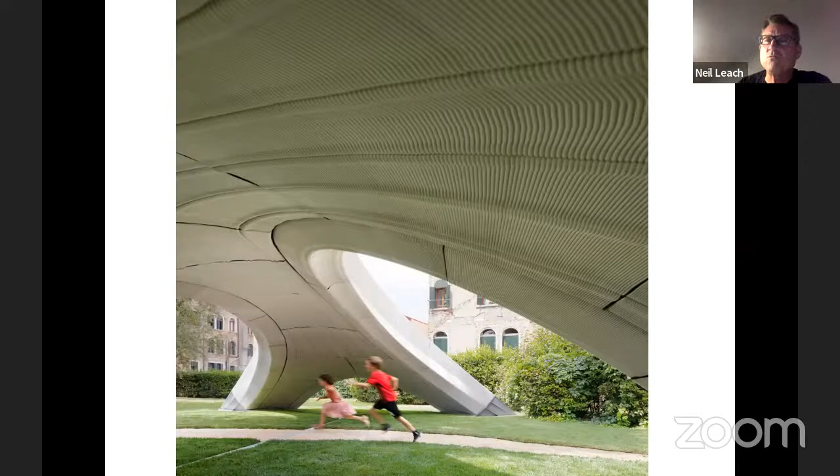Items in the house itself, tables, chairs, and so on. Clearly, something new had arrived on the scene, and very significantly too. And it wasn't just these furnitures; it was also these outfits. This kind of chainmail logic had been used to explore how you could produce clothing.

And of course, a few years after that, Behnaz Farahi and I edited an issue of Architectural Design on 3D printed body architecture, looking at this. A number of architects who were involved in this kind of world. There were shoes and even prostheses.

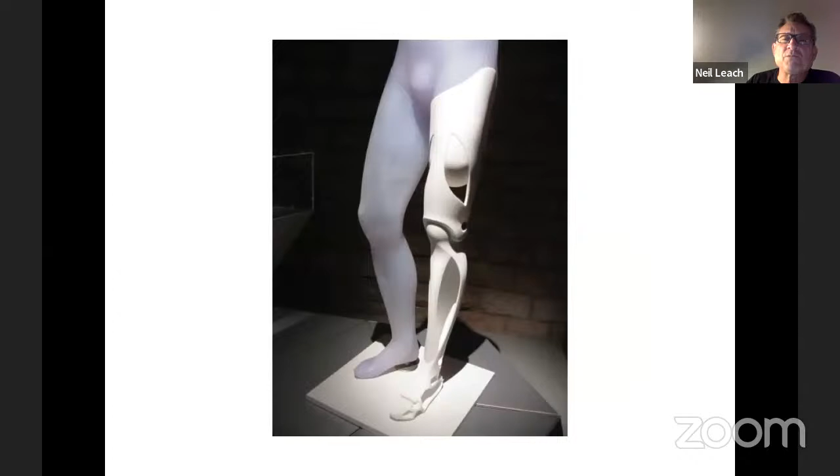It was a very interesting exhibition, but the architectural side of things was actually relatively behind. While all the items in the house had been 3D printed, the house itself was very far from being 3D printed. So these were the three exhibits that Marta put together for this exhibition.

In the background, a chaise longue that was designed by Kol/Mac and fabricated by Enrico Dini, really a pioneering effort. In the foreground, some small samples from Behrokh Khoshnevis, who was probably alongside Enrico, the leading pioneer at the time. And in the middle, there's a piece that was done by a group at Loughborough University in England that was initiated by Rupert Soar.

But this was it. This was it. Compared to the rest of the exhibition, which was very, very advanced, architecture and the world of 3D printing buildings was relatively far behind. I'm delighted that you have Enrico here today. He was absolutely a pioneer in this. He established D-Shape many years ago and was really very significant. So I'm not going to say much about it.

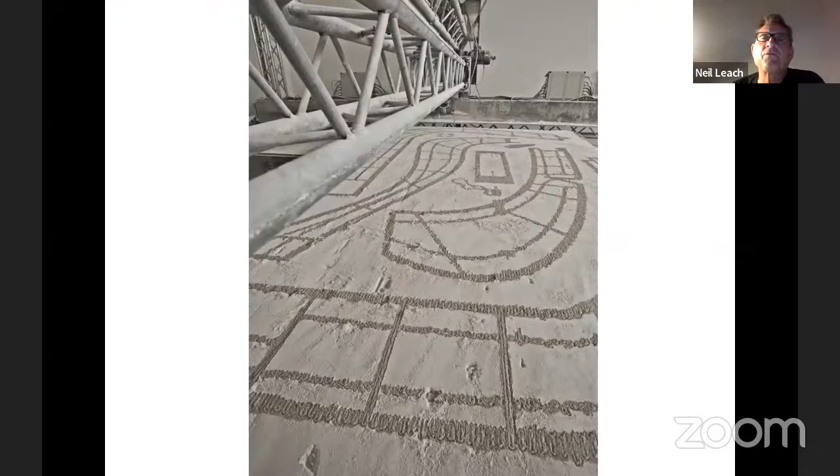It's simply to point out that his early pioneering work with D-Shape, where he was effectively 3D printing using a giant Z Corp printer with his own proprietary method, was really a great breakthrough for the world of 3D printing. And these were the components that he assembled into arguably probably the first ever building as such. I mean, how do you define a building? But this was an enclosure, and Enrico was responsible for this, alongside the chaise longue that Sulan Kolatan and MacDonald designed in New York, and it was fabricated in Italy.

The other great significant figure at the time was Behrokh Khoshnevis, who was an Iranian-American engineer based at the University of Southern California, with whom I collaborated when I was at the University of Southern California. And let's not forget that Digital Futures itself was a collaboration initially between USC and Tongji in Shanghai. And Behrokh himself came to one of our events to talk about his work.

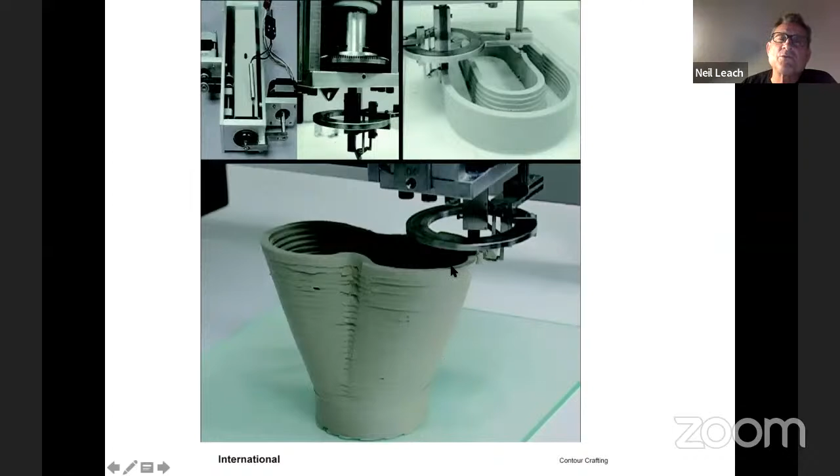And this is contour crafting. This is the technique that Behrokh established, a very different technique of layered concrete construction, where the concrete was extruded like toothpaste, and there's a spatula that was smoothing out the edge, so we get a much smoother finish to that. And this was very, very carefully controlled by Behrokh. He built a few example walls, but didn't necessarily go so far as to build a building as such.

When Behrokh came to Shanghai for the Digital Futures event, we introduced him to one of the local fabricators with the idea of some kind of collaboration. In fact, there wasn't much collaboration, but WinSun of Shanghai did build what they claimed to be a series of the first 3D printed buildings. I would claim that Enrico's was already there, but there we go.

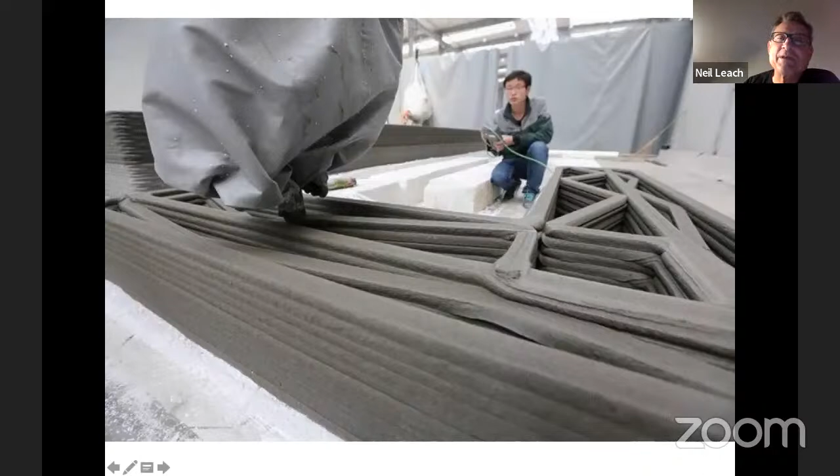And what was interesting is they effectively borrowed the technique from Behrokh. Behrokh was actually quite flattered by this, and he was interested to find out that, in fact, the technique of internal reinforcement that he'd imagined would work actually did work. Anyway, these buildings were built; they claim to have been built in 24 hours. Behrokh is somewhat suspicious of that. He thinks that it would have taken much longer for the concrete to cure in the factory before putting them on site. But it was done in the factory and then assembled on site.

Since then, they've gone on to produce things like this, and one could say that the whole field of 3D printing has really evolved. These are early examples of buildings in UAE, United Arab Emirates, where you can see that 3D printing has come of age, and it would be impossible to do a survey of what's been happening recently because the whole field has exploded.

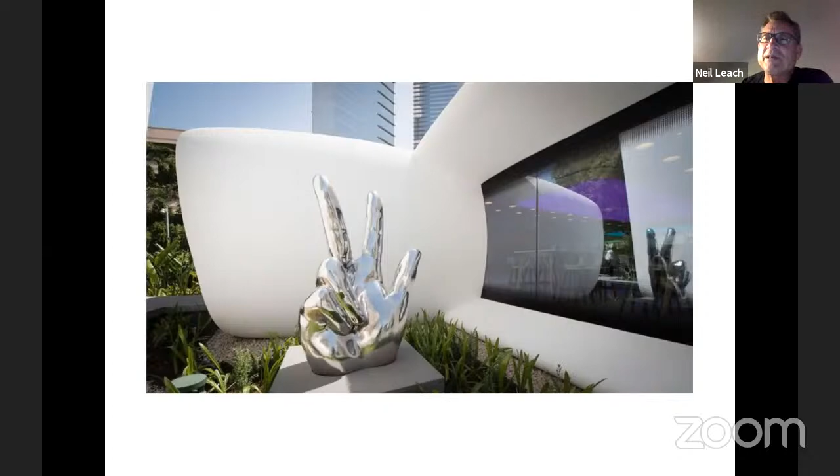And with the use of robotic arms and different materials for printing, the possibilities have really enlarged. We've moved beyond the bed of the 3D printer to something which is so much different. But I want to briefly also mention another aspect of this rivalry. I say a friendly rivalry because I actually introduced Enrico and Behrokh at the Bauhaus, I think in 2013 or something like that, 2010 or 11. And they got on very well.

We had a conference there about extraterrestrial architecture. There were two different ventures going on at exactly the same time, intriguing in many ways. One was a venture that was sponsored by NASA. This was the one in which I was involved with Behrokh Khoshnevis, with Anders Carlson and Madhu Thangavelu. This is our contour crafting machine on an ATHLETE hopper, printing material on the moon out of regolith.

So to house landers, it wasn't to make habitable dwellings, unlike the European Space Agency, who would fabricate complete buildings. NASA's project was to send the building already assembled to the moon. And then alongside this was a consortium in which Enrico Dini was involved, that involved Norman Foster Associates and several other organizations, which was looking at how you might actually fabricate a complete building on the moon. This was sponsored by the European Space Agency, and we were unaware of each other.

These two competing consortia were developing this, but this was a very different sort of way, where these mini little robots were printing onto a kind of inflated formwork and producing something remarkable. So that was back 2012, 2013 when these things were happening. And since then, of course, 3D printing has exploded. It's become a major event.

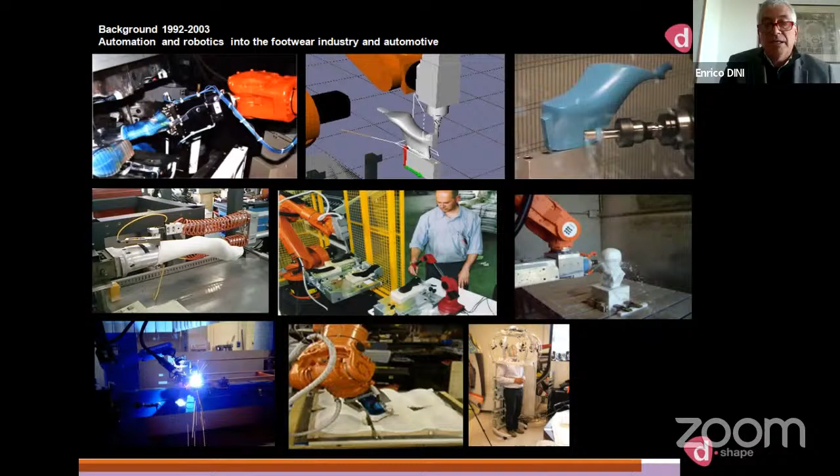Maybe nobody knows, but 3D printing in architecture started from the footwear industry, where I used to be involved until the invention of the 3D printing. And why I invented this? Because in the footwear industry was a quite new and fascinating device, a 3D printer developed by Z Corp.

This method, invented by Emanuel Sachs and other people at the Massachusetts Institute of Technology, was the most intriguing device I ever met in life, and willing to become a reseller, a dealer in Italy of this machine, I gave a presentation exactly to Piaggio, the factory where my father used to work.

And that morning, I had the idea that scaling up this process, that is a powder deposition process, this process properly scaled up might be used to print buildings. This is the idea to which I later devoted all my life to make it happen.

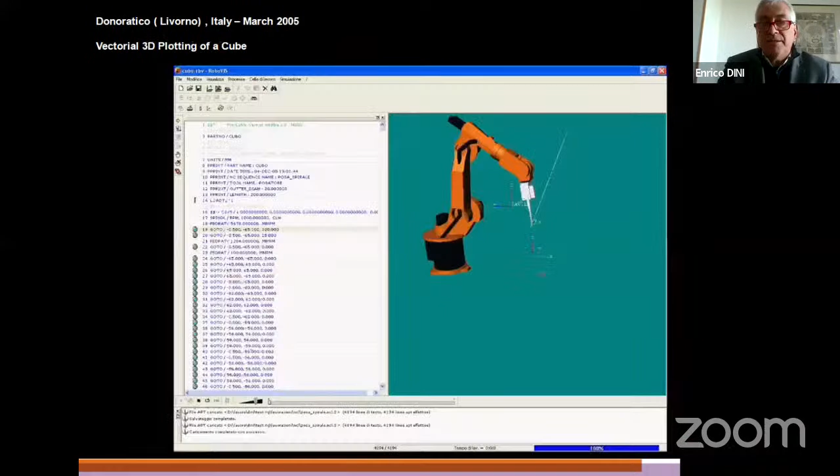And as an engineer, when you want to make something related to building construction, as a starter, you print a cube. So to do so, because I was a KUKA integrator and I developed what I used to call a post-processor, an offline simulation system that was later used as a standard by KUKA, we printed a very first cube.

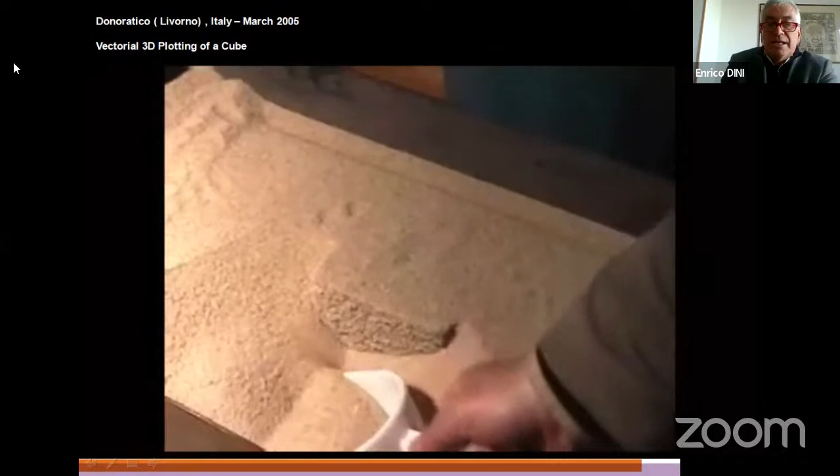I want to share with you this video that is related to probably the very first 3D printed item for architecture or building construction, merely, banally, a cube that we printed in Tuscany in 2005. And then because I was completely ignorant about parametric architecture, having made the classic studies, I decided to print a very classic Greek column.

And then when I realized that this process was too slow, in my opinion, for printing buildings fast and cheaply, I wanted to have not only one nozzle, but a multi-nozzle machine. So I abandoned the vectorial printing strategy, the one commonly applied today, and I moved toward a raster printing method called today particle bed 3D printing. So I wanted to develop the analog of an inkjet printer at a higher scale.

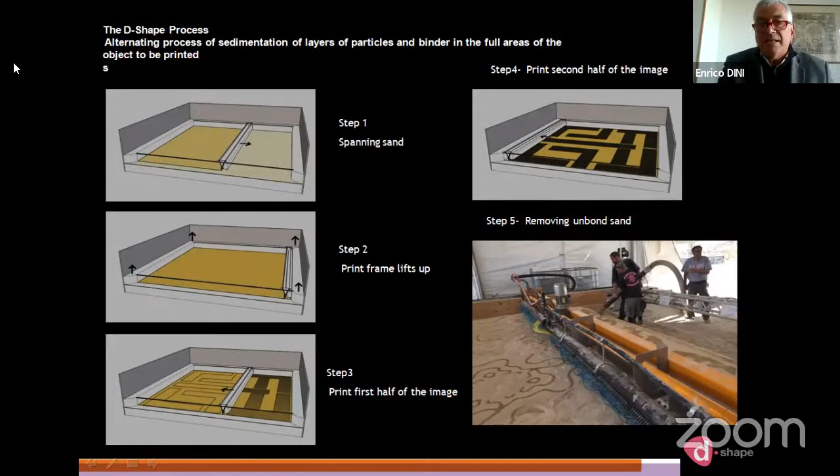Some of you maybe have seen my process several times, but in principle, the building process that I invented, maybe copied by Z Corp, is made of 5 steps. The first one consists of spreading sand or gravel or any particle, creating a thin layer, and then printing the section of the object to be printed on it, and then repeating the process again and again, and at the end removing the sand to unveil the object.

And this is the most exciting part of the story, because meanwhile I was developing the 3D printer, I asked Andrea Morgante, who used to work for Future Systems, to develop an iconic object to be printed. I had in mind something like the tempietto of Donato Bramante on the Gianicolo Hill in Rome, and Andrea proposed a shape inspired by the skeleton of an amoeba, a radiolaria, that became a sort of gazebo.

And in June of 2007, we attempted to print the radiolaria directly on site. This is just a rendering, but unfortunately, the company with whom we partnered to get the binder never provided us anything. So I had to dismantle the printer and bring it indoors.

And I developed the printer and the binder, despite not being a chemist, adopting an abandoned bonding chemistry called Sorel chemistry based on magnesium. And this way I could realize a sandstone made of magnesium oxide and magnesium chloride.

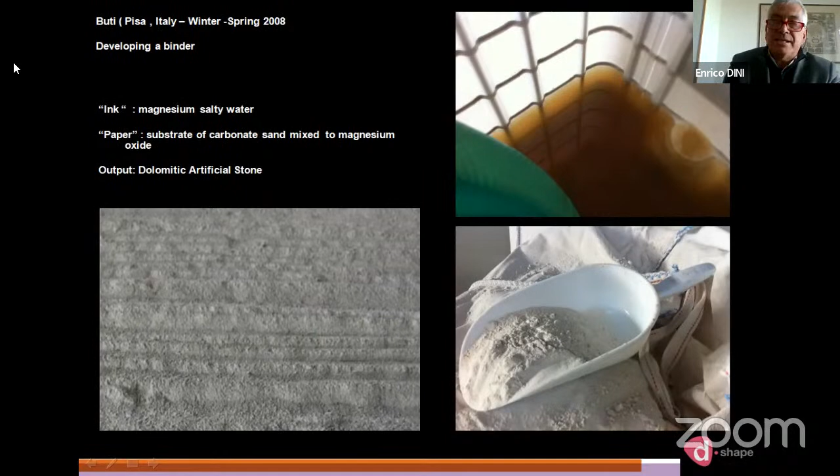You might wonder why you don't print concrete. At that time I was so freak and hippie and in love with adopting novel bonding chemistries. Unfortunately, this is a chemistry very delicate to apply, and I didn't know at the time of the existence of the geopolymers that I use today.

The morning of July 2008, I printed with my brother Ricardo the first layer of this radiolaria structure, and finally we realized the first 3D printed structure. And willing to scale up the radiolaria sculpture immediately, we scaled up to 8.5 meters height.

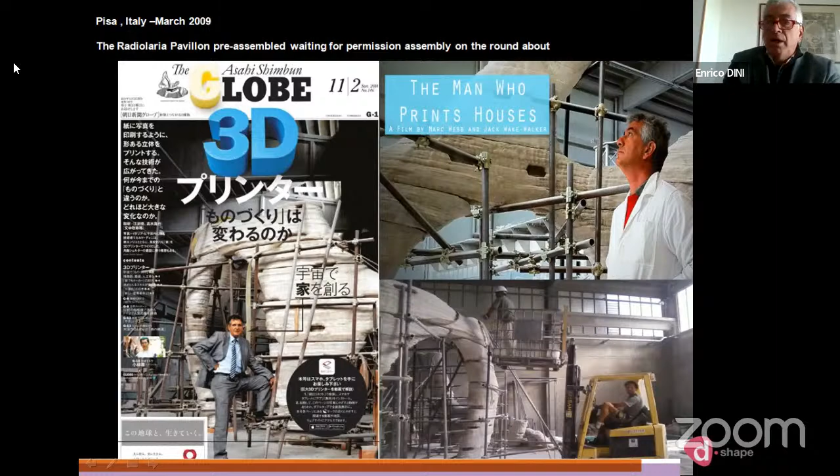Apparently the municipality of Pontedera accepted this work, and we worked hard to print in 3D this structure sub-partitioned in building blocks, it being quite difficult to print in one go on a roundabout, but unfortunately we were never given the permission to place the radiolaria structure on the roundabout.

In the meanwhile, as Neil mentioned, I was absolutely struggling to showcase the first 3D printed home. This is a sketch that was made by James Gardiner, an architect that was introduced to me by Mark Burry, the engineer-in-chief of the Sagrada Familia, because at that time I wanted to print something as a tribute to Antoni Gaudí. That's why I went to Barcelona.

And we hoped to print the entire building structure to be assembled in Sardinia, in Porto Rotondo, but again, the landlord owned just the land, but not the money to afford the expenses related to the realization of the entire building. So basically, this is a story of a wish of printing a house without succeeding, almost never.

Except one time, 1 year later, when La Triennale Museum commissioned me a very basic concept of a 3D printed house. To be honest, I dislike this approach because 3D printing is a means to create amazing organic shapes. But the architect said, no, Mr. Dini, I want to say that we print houses in one go and we have to make something extremely simple.

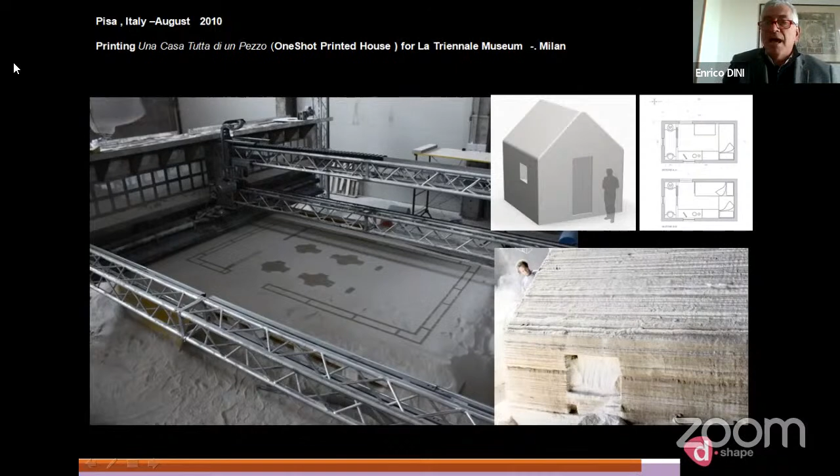And this is the reason why in November 2010, we delivered this tiny home. I don't know if it can be considered the first 3D printed home. In my opinion, it is indeed, despite only hunters having visited this tiny home on the top of a hill in the middle of nowhere on the Apennines close to Faraneto, in the Piacenza Apennines.

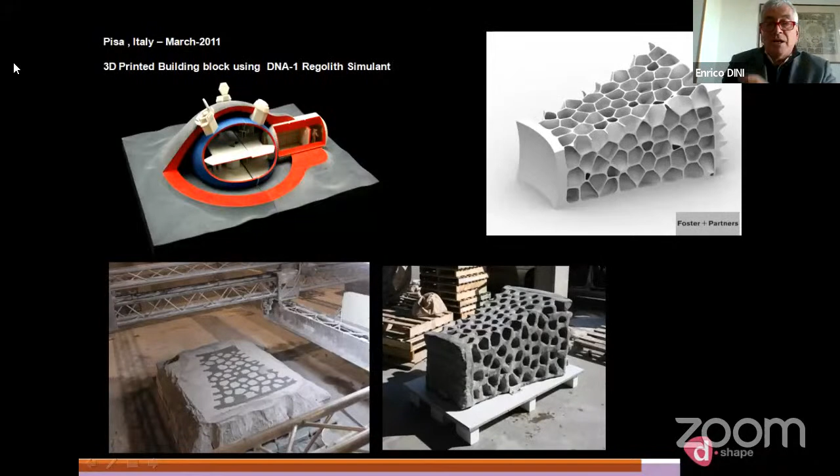And then, as Neil mentioned, I started to make a lot of experiments in different fields. Space, using lunar soil, has been an incredibly successful project, despite being a project of minor importance compared to the wish of printing homes on the earth. But the collaboration with Foster and Partners was successful as well.

Probably the best thing I ever did in life has been applying this technology to print artificial reefs. Again, this idea of printing reefs is not flour from my bag. It comes from James Gardiner, who, intrigued by the potential of this method, proposed to me to save the Great Barrier Reef of Australia by printing reefs. And so we did. There is a booming market around 3D printed reefs, and I can proudly say to have printed the first.

And not so proud as well, printing a shelter for anti-ballistic purposes for the military is just an achievement, just a priority. And finally, let's come back to the bridge.

Well, I was approached by a Chinese company and also by a Dutch company, among the several who were asking me to print ships in 3D and any kind of structure, but the one that asked me to print a bridge in 3D, to make a feasibility study, was the most intriguing, because my father was very close to passing away at the time.

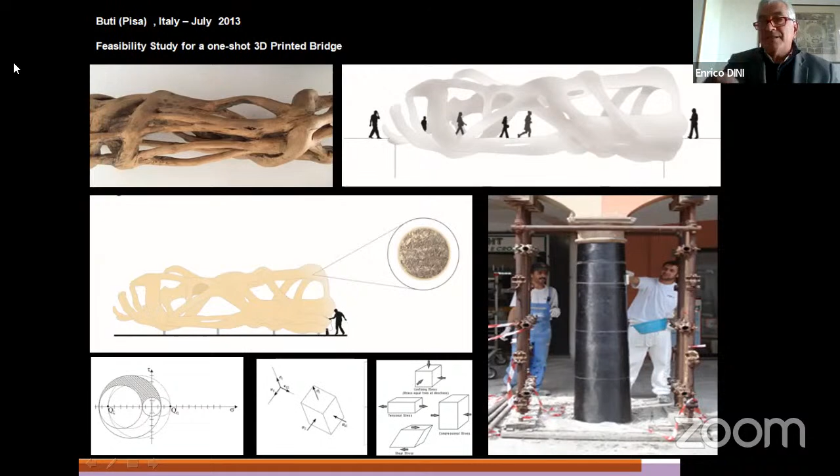In fact, he passed away in 2015, and as a tribute to his memory, before he died, I made some studies to make an organic bridge. Basically, the concept was to print the bridge with very lightweight material and bind the bridge with fiberglass textile, or even better, basaltic textile. We made very small attempts printing chipped wood and binding with basaltic fiber.

This was just an exercise that remained dormant until we had the opportunity to enter into collaboration with Acciona in Madrid. Acciona approached us in 2014. The initial idea was to print artificial reefs. I was pushing heavily for doing that.

Acciona asked for a custom printer, more automated compared to the one that we did before. And to comply with this need, we made a machine that we can define like a super gigantic Z Corp printer, a machine with an incredible system to lift tons of sand.

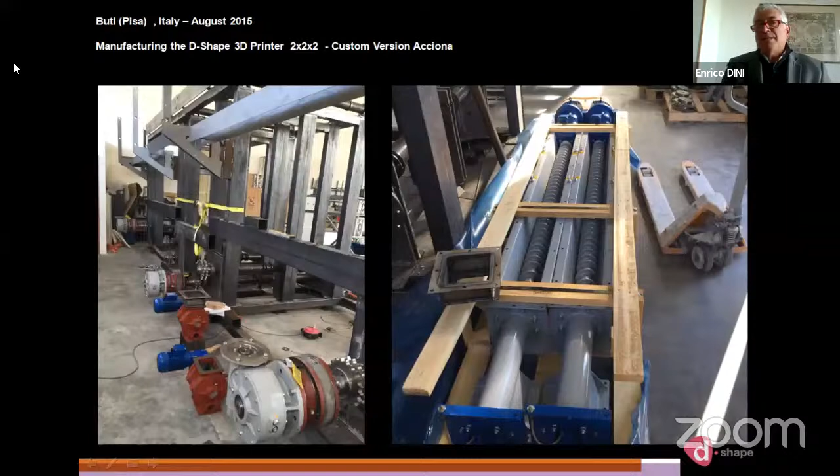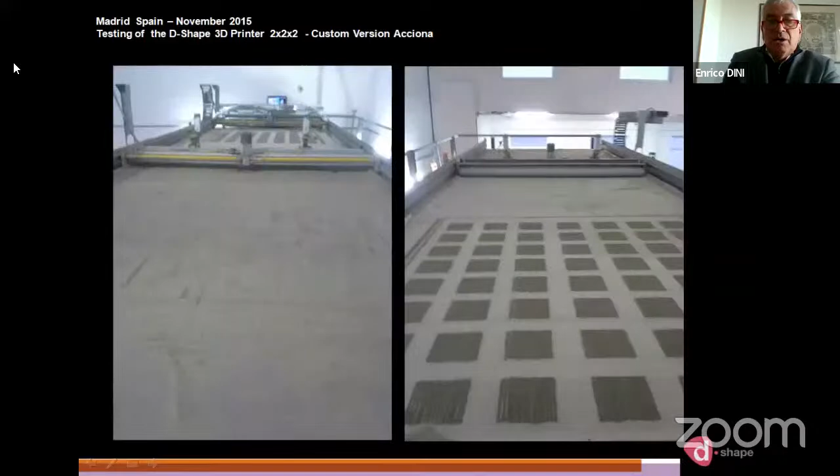Acciona opted to use not magnesium chemistry, but a mortar of Portland cement. And in November 2015, we moved the printer purchased by Acciona to Madrid, and finally we started to make the very first testing, printing again for testing cubes. And this is how the story began to prepare the object to be printed.

And when Acciona asked me, Enrico, what would you suggest to print as a first object? Well, as a provocation, I said, why don't you print a bridge? But Acciona was not confident with organic design. Acciona is an engineering company, they make straight things. So I suggested to approach IAAC, where I have a lot of friends. And this is how the contact and the collaboration between IAAC and Acciona began.

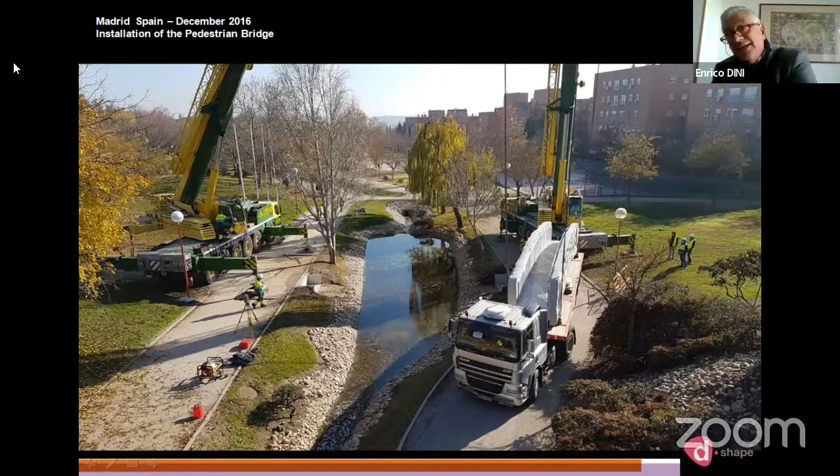And since then, I make one step backward, because IAAC knows what parametric design is. I was updated on what's going on with the bridge and the first blocks. Despite I was willing to print the bridge in one go, I had to accept the idea that we might print in sections. And here you see the section of the bridge and the pre-assembly. And finally, after a couple of years' work, from the beginning of the design of the printer until the full testing of the printer, the printed bridge was placed.

And this is the end of my presentation. What we do today: I'm in love with artificial reefs. This is my main job today. We are having good success in Hong Kong, where we recently deployed a set of basic artificial reefs, but with amazing smart foundation systems.

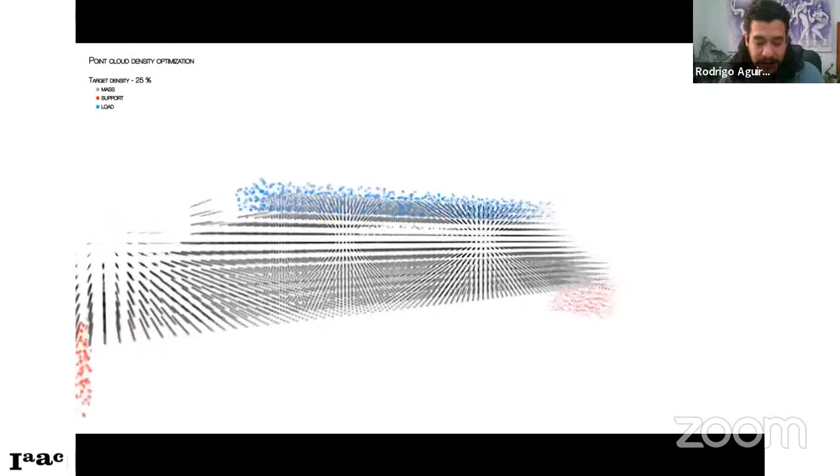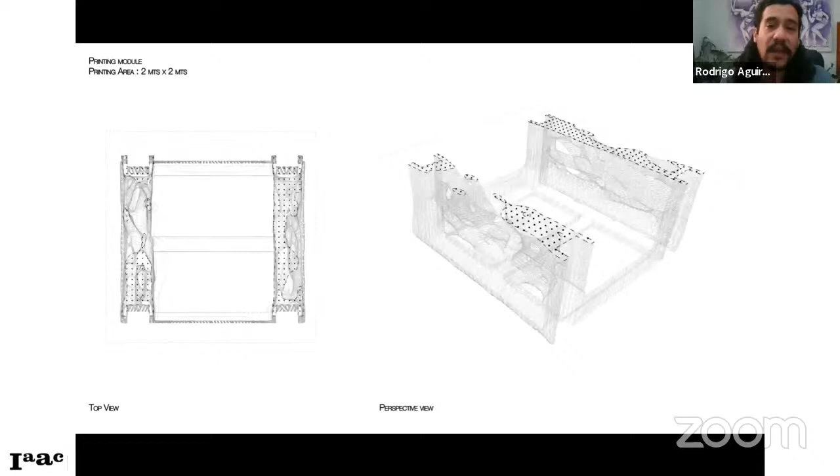Basically, we were asked to design a 12-meter long footbridge in Castilla, in Alcobendas, in Madrid. It consisted of 3D printed micro concrete modules that were 2 meters long and 1.5 meters wide. The whole idea, as Enrico mentioned, is to take advantage of the opportunity to use this 3D printing technique to free ourselves from straight lines and be able to create more organic and porous shapes.

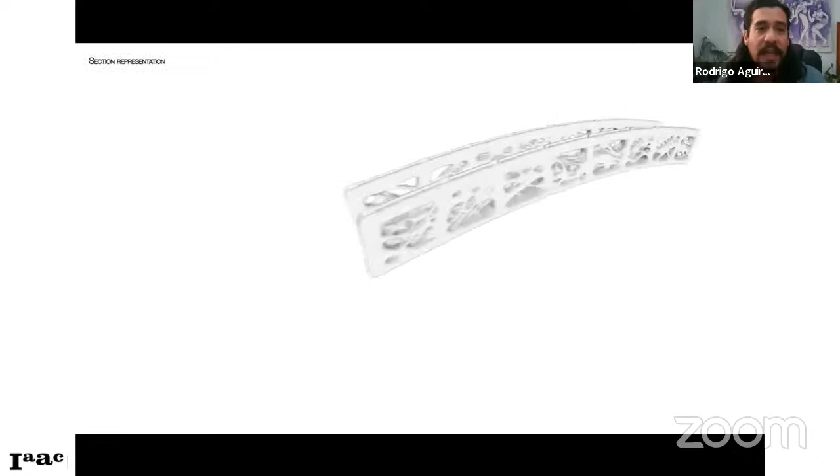Now, this brought a lot of challenges in order to design and build. So we were working very closely with the engineers from Acciona, going back and forth. The biggest challenge was to deal with these complex geometries, which had to be boiled down to very simple modules that could then be calculated as 3-dimensional shapes with ANSYS, for example. So it brought a lot of pieces together, mainly in the computational design development.

We divided it into 3 main aspects. The first one was the topological optimization for material distribution, because we wanted to make it as lightweight as possible and distribute material only where it was needed. In order to create the porosity afterwards, we tried to add vectorial agency.

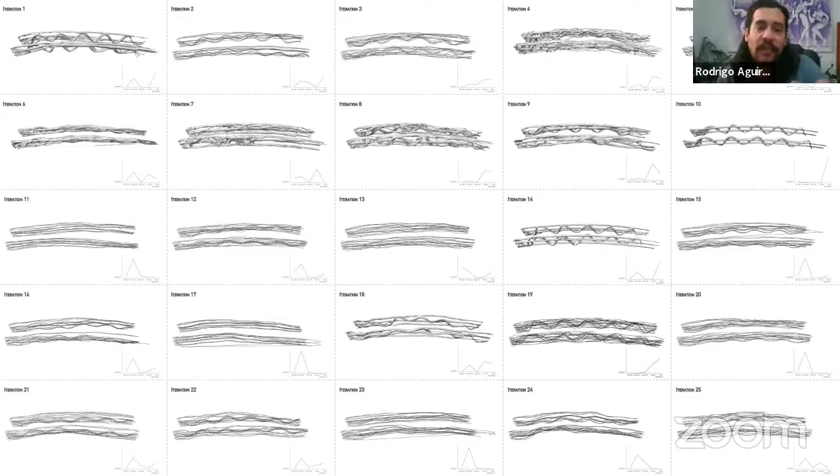So in this way, they would actually create this flow as an attractor, and later on be able to use that in combination with mesh wrapping morphology in order to close up the design. So of course, being a computational designer, specializing in parametric design or algorithmic design, allows us the possibility to go through many iterations. So of course, we had to go through many of these catalogs in order to see which are actually the possibilities that we could actually achieve.

To achieve this kind of texture, these porosities, these elements that actually had a lot of constraints, but at the same time we had to take advantage of to be able to produce. So you can see how by playing with these kinds of flows, we were able to get that surface over the stone, which in the end looks very organic and almost natural, you know.

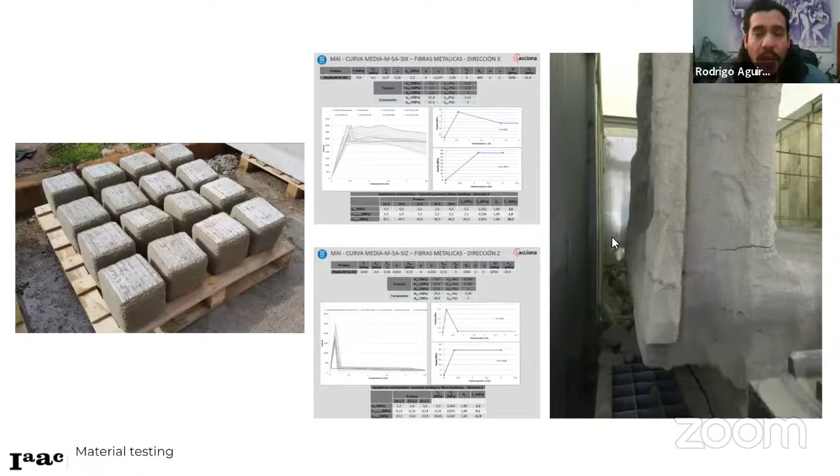And of course we were at the same time in the site of Acciona. They were actually researching and testing this new material that they were working with, which is microconcrete, and they were trying to see in which direction we needed to print. So obviously doing testing, working with UPC so they can actually get the actual numbers, and the testing you can see on the right side of the image, how the different tests would come out, sometimes with errors. And so obviously this was great help for us as feedback to regenerate the shapes and control how we're going to print it.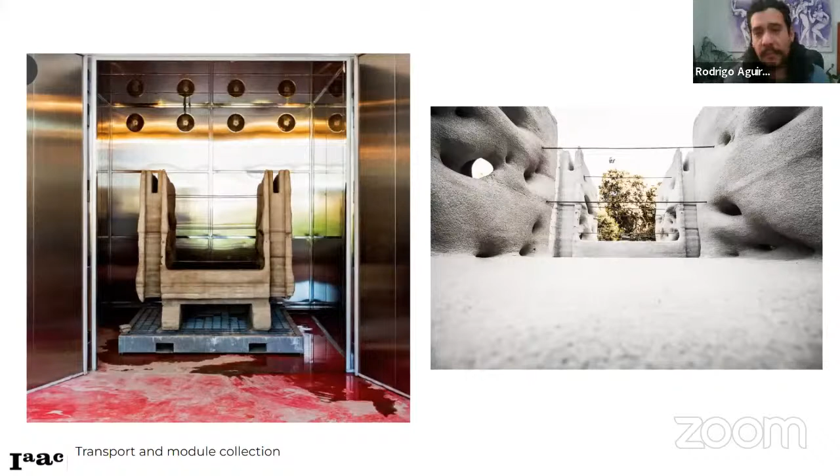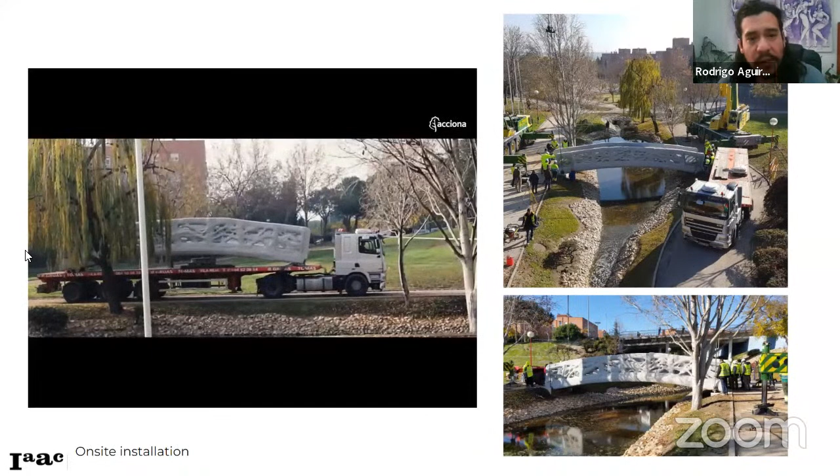So obviously the very interesting part is how they actually produced the whole bridge. It took around 2 months to produce all the necessary pieces. They were producing them in Acciona and then moving them into a different location, so they could be placed, stored, and put together. You can see in this small video right here how they're actually transporting all the pieces once they're all put together in one piece directly to the site.

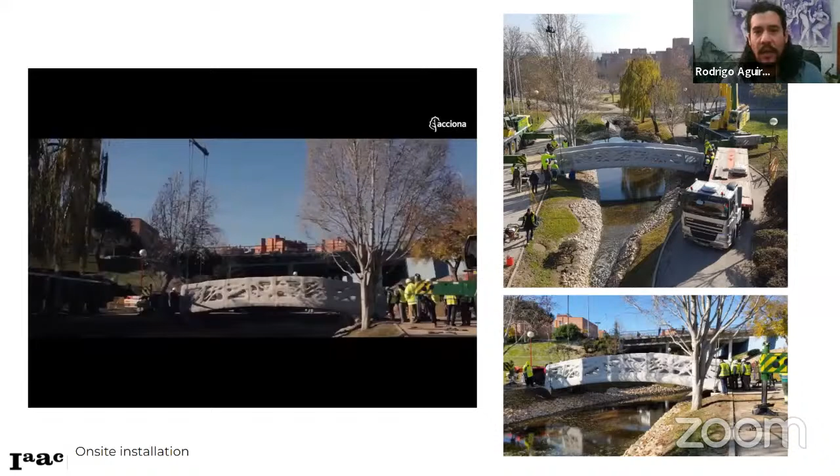So like I mentioned, the project itself was around 2 years, 1 year and a half, 1 year of design, let's say, plus 2 months of production, and only 2 days to locate it on site. So obviously there's a big conversation about the methodology of 3D printing in terms of production, and how it can be located in place, being treated more like prefabricated pieces and brought later to the site.

But overall, it was a great experience. And I think that for the challenges that Acciona had to face, having this new machine based on the technology of D-Shape, it's impressive that they were actually able to do this. And they actually set the standards for the upcoming projects in the future. Thank you.

Rodrigo, thank you. That was also fascinating. There's a whole story there that I didn't know about, and that's incredibly interesting. I really think, Philip, that we should be making a book out of this, because this is fascinating. And I think what's interesting is that just as Behrokh Khoshnevis and Enrico Dini didn't know quite what each other was doing, even on the space thing, so we didn't know what was going on at IAAC. And in fact, Philip thought he'd 3D printed the first ever bridge. I pointed out that it wasn't, it was IAAC. But it's absolutely fascinating to find out about those things. So thank you so much.

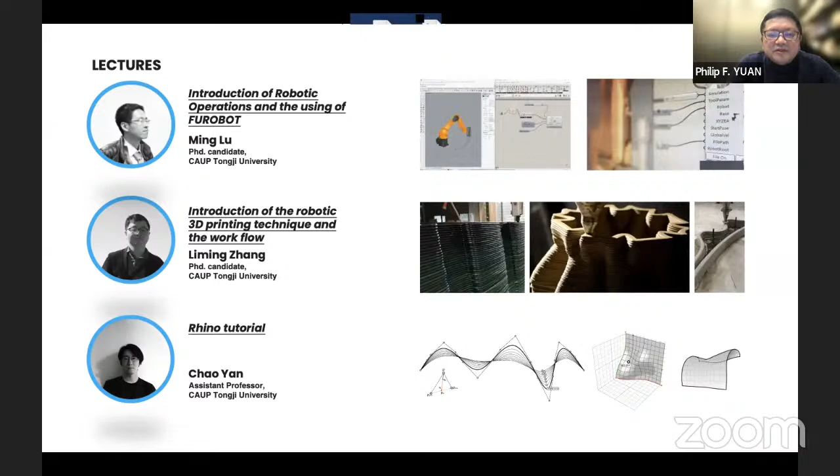And also Liming Zhang, who is also a PhD candidate at Tongji, introduced the workflow of how to integrate structural performance design and 3D printing technology. And Yan Chao also introduced Rhino and Grasshopper as teaching studio content. So this is all the students, and every student designed a bridge and also 3D printed them at a small scale, 1 to 20. At the same time, we printed a part of the bridge as a mock-up, 1 to 1 scale, in the courtyard of the office.

So I think in 3D printing, structural performance matters. And most importantly, I think graphic statics is a very ancient technology, which can date back to the Renaissance, when Da Vinci also expressed in his manuscript the idea of representing the magnitude and direction of forces by means of line segments. And the German engineer Karl Culmann, who is also named the father of graphic statics, played a very important role in setting up the technology.

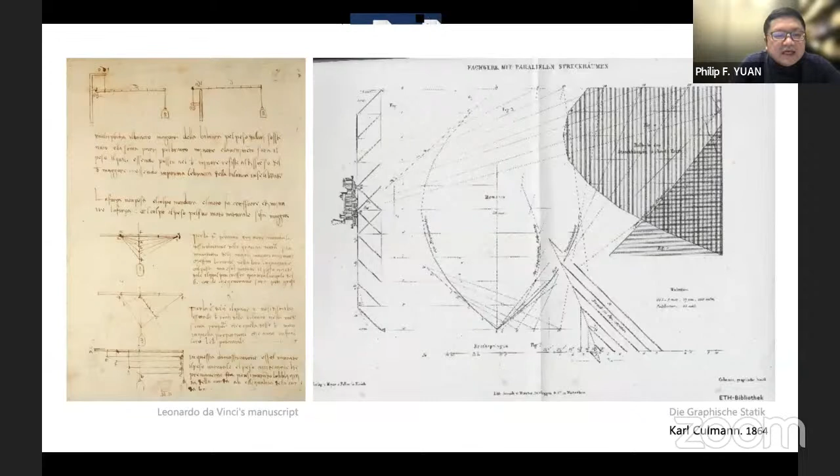And the Swiss engineer Robert Maillart was a pioneer in the application of graphic statics and designed super light and famous bridges, making full use of concrete as a compression material. And another Swiss engineer, Jürg Conzett, who graduated from ETH Zurich, also introduced the principle of graphic statics, transforming the force flow into elegant pedestrian bridges. I think it's all inspiration we can take, learn from, and implement into robotic concrete printing.

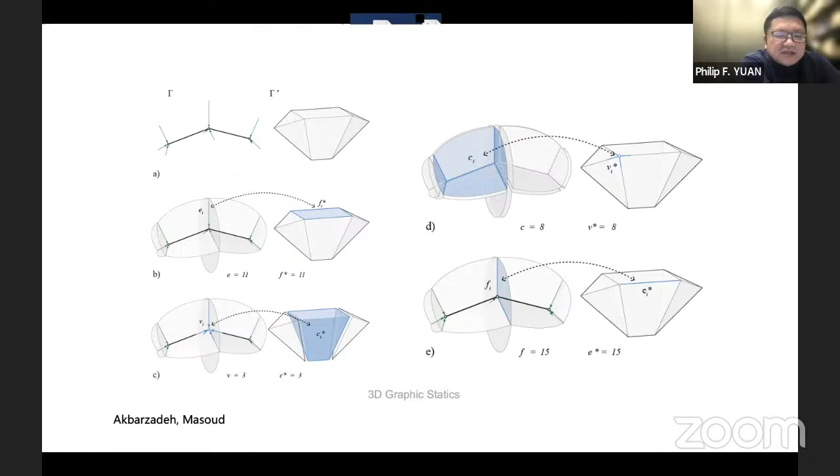So the most exciting development of graphic statics is its three-dimensional extension. A fully three-dimensional extension of graphic statics would create new possibilities for dealing with complex 3D structures during both the design process and structural analysis. So in the form finding method, every face of the forces relates to an edge of the form, and the magnitude of the forces is equal to the area of the connecting faces. And we can introduce different kinds of platforms developed by different structural engineers and structure offices. A very important one of them is Polyframe, developed by Masoud Akbarzadeh from UPenn, and we also invited him to give a lecture to all the students introducing this special software.

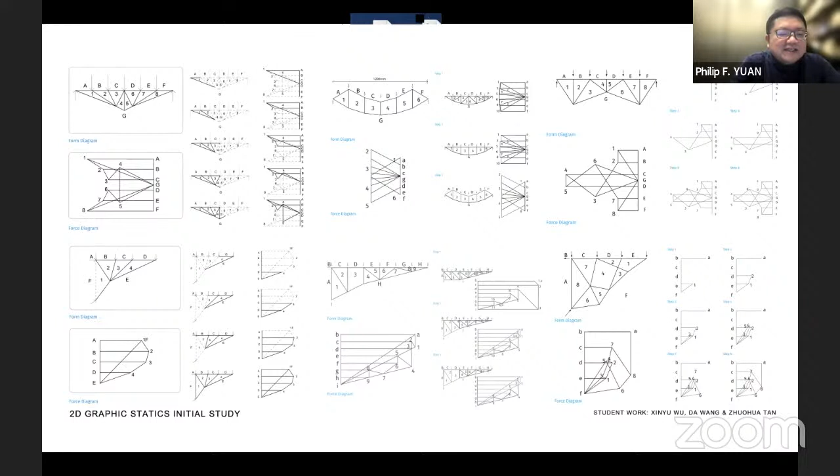In the design process, very initially with research on the book by Allen, the students are able to get a clear idea of the forces and the form. Learning from practice, students start their forces study journey by designing the truss system two-dimensionally. Before, designing structure was often shown as an analysis of the form, but with the help of three-dimensional graphic statics, we're able to design the forces first and use it as a form-finding methodology, which reverses the thinking pattern in the design process.

With enough knowledge from the previous forces analysis, the students tested three-dimensionally with Polyframe, the program which showed them the potential to design in collaboration with the software. Architecture school students can also collaborate with a toolbox and learn different structural knowledge through this platform. So these are two of the best works from the students, and this is one of them. Designing bridges is a practice that students did at a smaller scale, exploring structure, analysis and aesthetics.

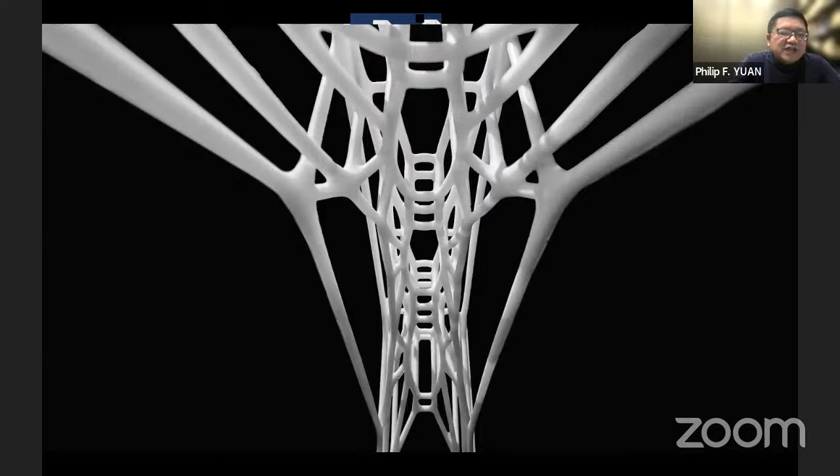So this is the iteration, how to test different forms by playing with the force diagram and then transfer them into the form of the bridge. The concept can be seen in the plan of the shape and force diagram as three circles in the middle. The student's work starts from the radial force diagram to form a unique bridge structure with a circle in the middle, and then optimizes the force diagram by increasing the number of radial centers in the middle of the form, a unique structure with three tangent circles.

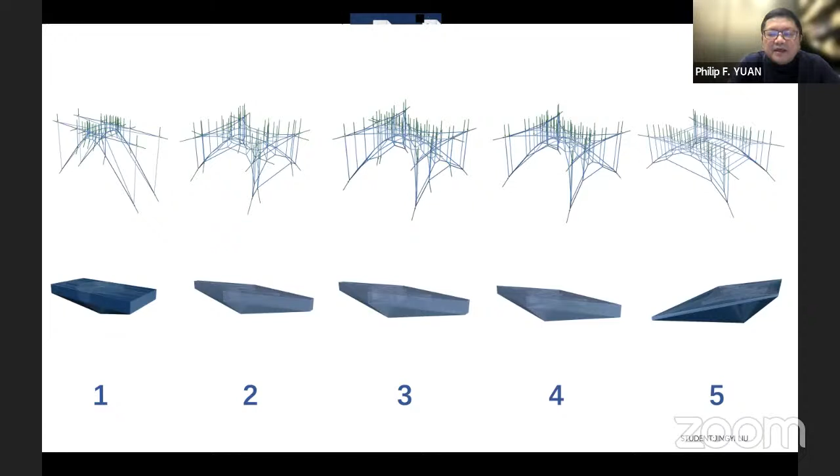During the design process, the force diagram was continuously adjusted to change the shape of the diagram. So these are the different generations the student optimized and played with. The bottom is the force diagram, and the upper is the form diagram. So it's a kind of translation, understanding the forces through the pixels of the forces. These are looking into more details of the design process.

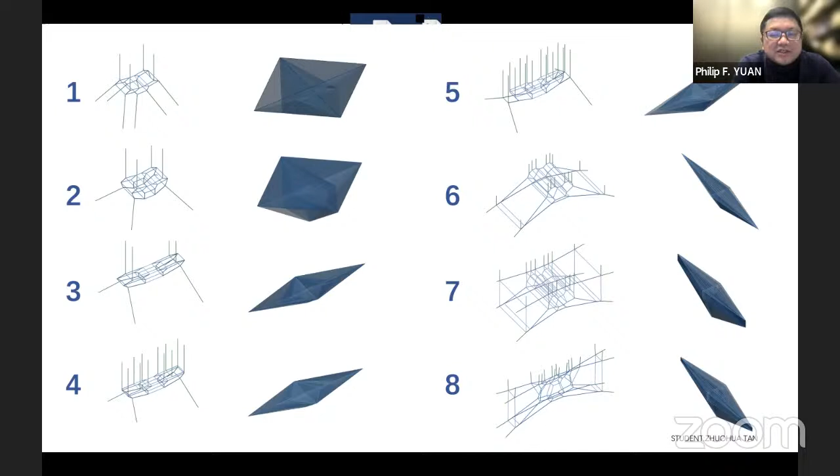When designing the compression-only bridge, the students designed a 2D pattern, which will be the members of the form later, and extracted it as a Polyframe geometry. Later, we can find the special faces of the force diagram, generate the form based on the equilibrium, and optimize it with the magnitude. The students also sought to produce the change in form from the vertical as a way to produce a skeleton-like structure. These are the different steps of designing a compression-only bridge through three-dimensional graphic statics.

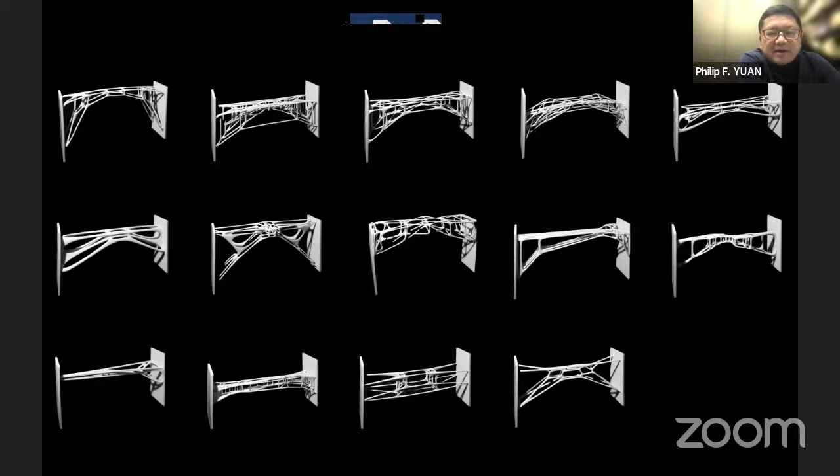So we have 13, 14 students, and every student is actually learning this kind of structure performance-based design and re-understanding why we use 3D concrete printing. It's not just about robotic technology. It's not just about beauty, but the structure matters, the form, and why we should implement robotics to print such bridges in the future.

That's not finished, because we need to ask the students to test if the bridge is strong enough as a structural object. It's not just about aesthetics, it's about structure. So we test a load of 15 kilos on top of it, and also hang a load of 10 kilos at the bottom in the middle of it. You can see the testing process of each bridge. All the bridges were tested with the loadings.

So the most outstanding in shape and loading ability are two of the best bridges by structural performance. At the same time, we find them extremely beautiful, because the beauty comes from the structure, the force flow from the students' research.

And afterwards, we tried to introduce the fabrication technology into testing the details, the mock-up of part of the joints of the final bridge. So we're taking special joints, which is critical if the bridge is not totally in compression. At the same time, we need some side tension forces if it could be cantilevered, or to make the joints possible.

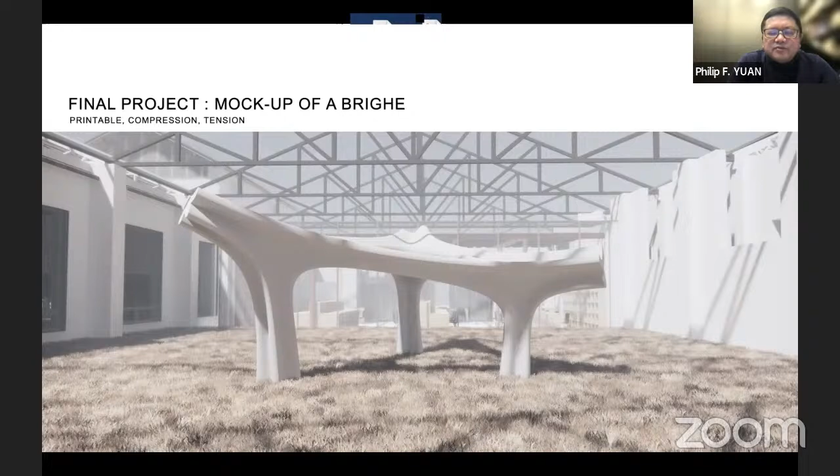So we take the courtyard of my office as a mock-up test, and you can see this is the process. We actually implement PolyFrame again to research the details, which is about the geometry of the force diagram, extending all the support points, and testing from the two-dimensional diagram to the three-dimensional force diagram.

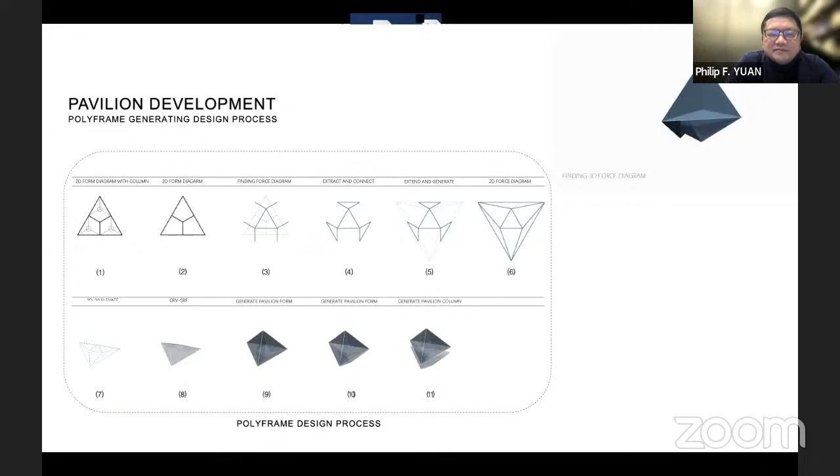And then for the objects, on the top here you can see the initial force diagram of the three-dimensional installation, and the bottom is the initial form diagram representing the initial forces of this special installation. So at the same time we test again the workflow of this force diagram and form diagram, and after iteration, to make the form more reasonable at the bottom, we need some connection joints. So the most important part of the design is to simplify to the minimal elements in order to represent the second form of the installation.

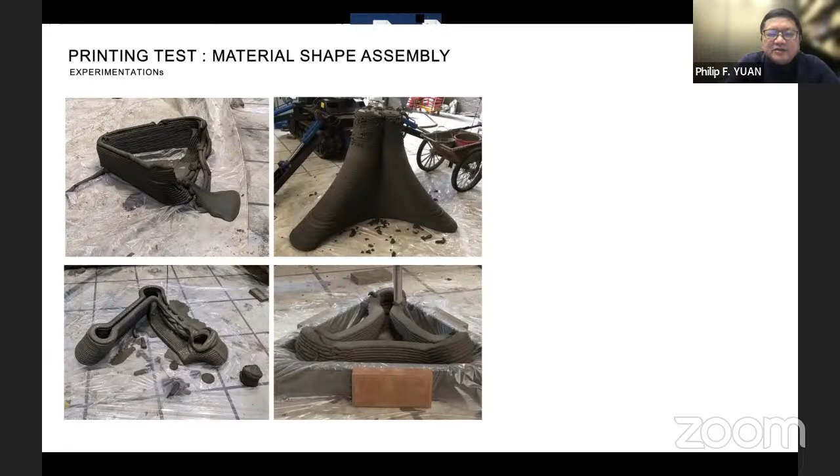And then we're testing the concrete printing, because it's the first time for the students to make use of it. Although the machine was already developed, students need time. They spent almost 2 weeks to understand the material, the concrete. And then we test the special mock-up, 1 to 2 scale, of the special joints. We need some tension to connect different components.

So in order to save materials, we also introduce Ameba to reduce the concrete material. We should use as small an amount of concrete as possible in this installation. So this is Ameba. Although we can find the form from 3D graphic statics, we introduce Ameba as a second plugin, which is the hybrid authorship I introduced to all the students, because future architects and designers may not have very deep knowledge of structural analysis, but you can collaborate with different toolboxes. So I name it a kind of hybrid authorship. The architects can collaborate with different tools.

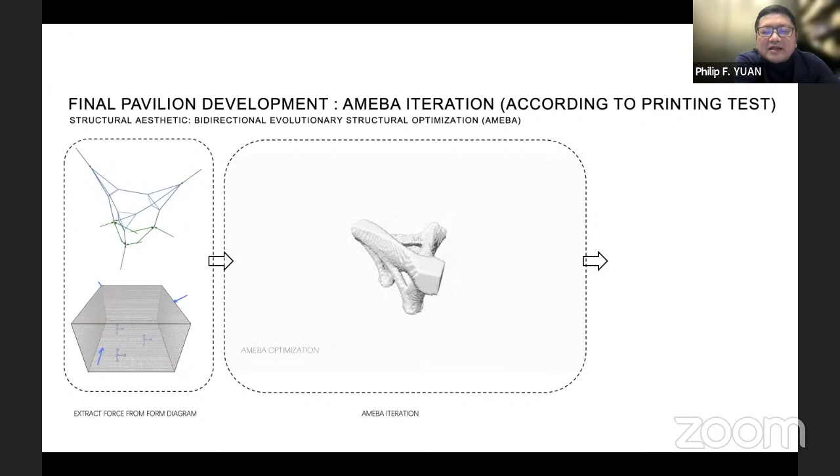So the first step is PolyFrame. The second step, we introduce Ameba to the students. And the third step is FURobot, which is a robotic printing platform. The students can print all these kinds of forms in a very short time. So these are the objects after optimization. And we also introduce some structural analysis by Karamba, another software platform, to prove the whole structure is safe enough. Because this is a discrete system, we have different components, so we should test if this kind of connection is safe.

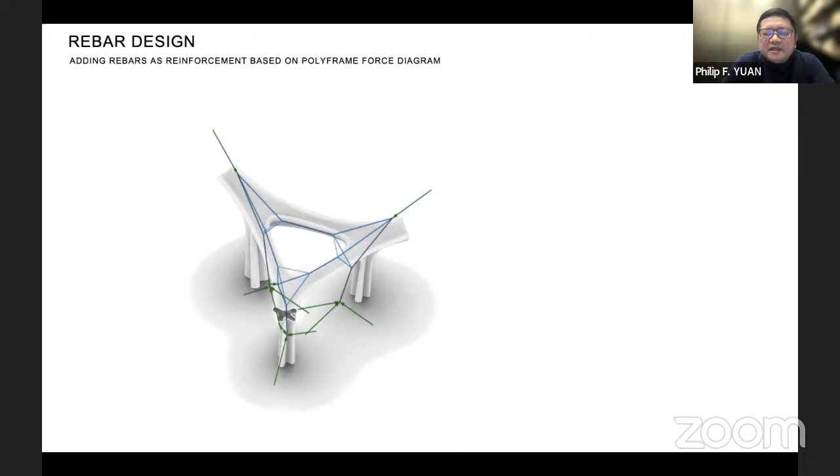So this is the initial form diagram of the forces and the components. So the physical intelligence, or the material intelligence, is actually embedded into the force flow and into the structural optimization. So robotic concrete printing is not just about the concrete and not just about the robotics; the structural performance matters a lot to future robotic printing. At the same time, we have not only compression, we also have tension because we have a cantilever. So we introduce these kinds of cables for the tension to keep the whole structure safe.

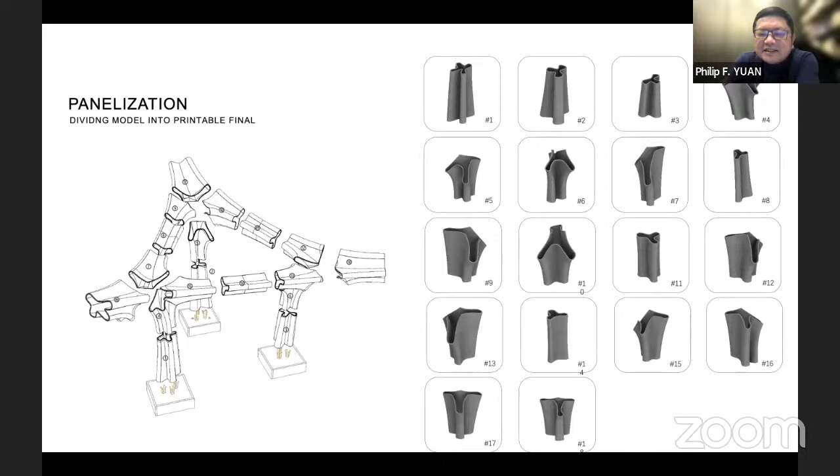And then we subdivided all the components of this installation. The biggest challenge for the 3D printing is the non-parallel contour-line printing. You can see the height of each layer of the 3D printing is different. So it's a very advanced test for the team, because we need to script all the toolpaths in a very accurate way. That's also why we use robotics to print rather than a 3-axis CNC, because the robot has 6 axes, which helps to print these kinds of multi-height contour layers. These are the components and how to put them together.

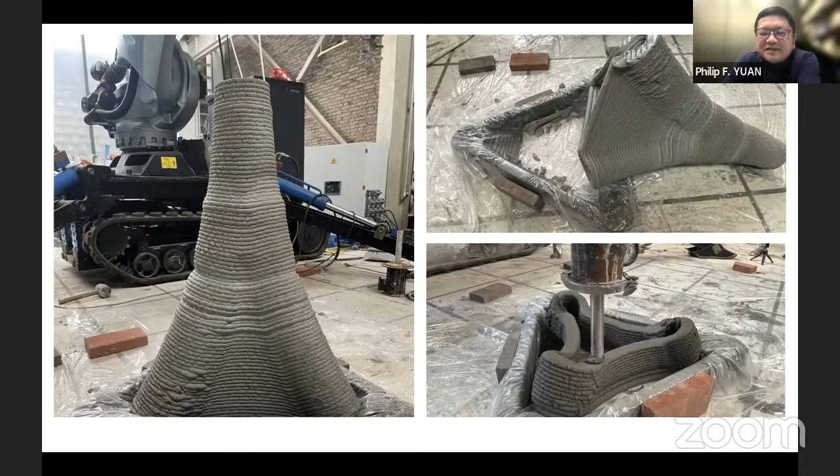So we designed all the drawings carefully with steel connections, which are accurately 3D welded and laser cut, and then we embedded them into the concrete. So these are the toolpaths of the 3D printing we generated by FURobot. And the students spent a long time on all the drawings. They have no research background, but they had to learn in 1 semester how to print it. These are the drawings in the mock-up, and these are the machine and the components printing.

And we tested a lot of failures, but actually it's very good for the students to understand the material performance and the materiality of the concrete. So these are the toolpaths generated by FURobot. And not only does each layer of the printing change, but also the height of the print, and the angle of the effector also rotates through the printing process.

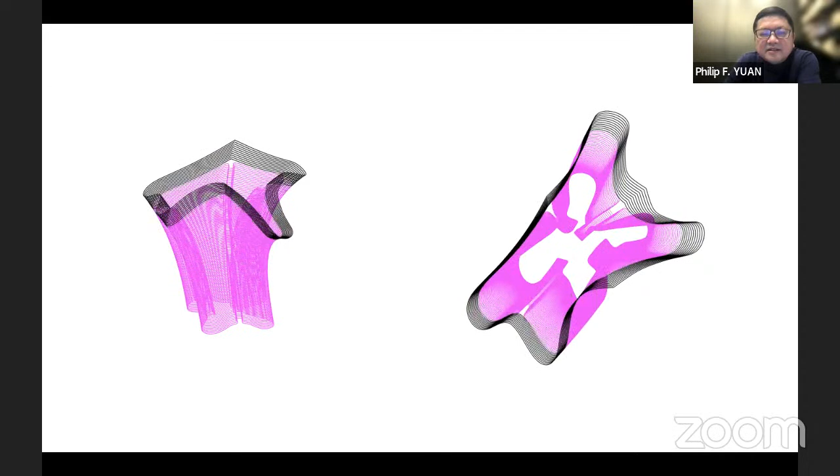These are the printing toolpaths we researched. They're not parallel, you notice; it's changing the height of the printing layers. And this is also simulated by the robot simulation of the printing toolpaths. This is the printing process, and also the joints for all the discrete components. And the students are learning in the whole process.

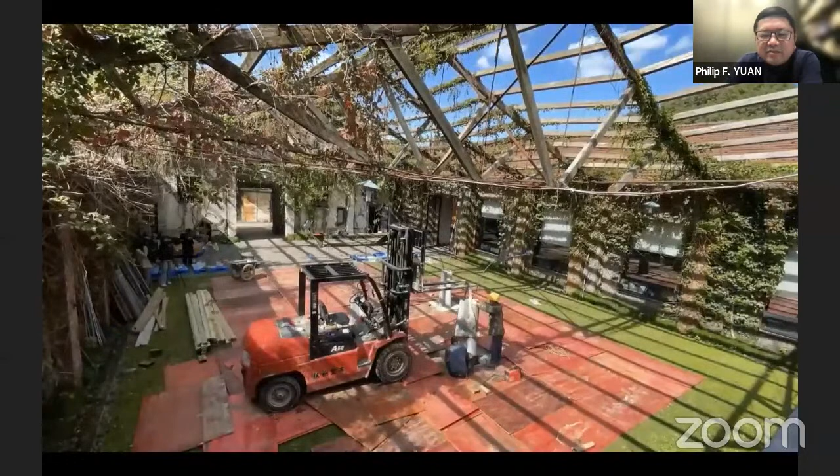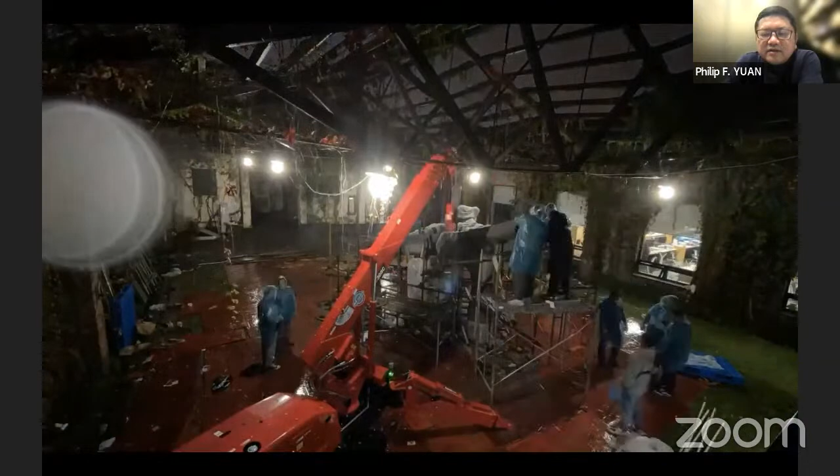These are the assembly process in the courtyard by all the students, and two professional workers helped teach all the students how to put them together. So all the components were fit into the site and assembled in 3 days. It's very fast, and also the prefabricated discrete components are put in different locations, with the tensioning of the steel wires, and all the components put together.

So these are small models, and the final object installation. The students are very happy. In around 3 months, they learned a lot, from the structural performance design to the implementation of robotic concrete printing as a structural object.

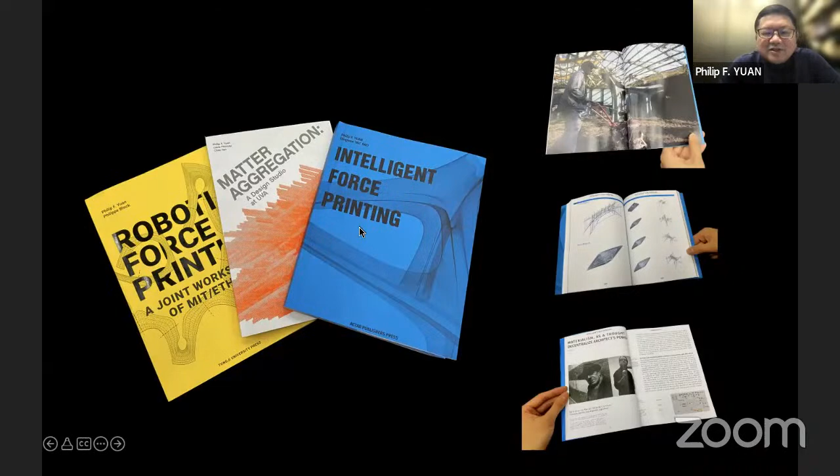And at the same time, I was invited as a visiting professor at MIT, and I'm co-teaching with Philippe Block; the first book is Robotic Force Printing. Second, I was invited as Thomas Jefferson Professor at UVA, United States, and the book is Matter Aggregation, where we introduced timber robotic fabrication. And the third book is coming this year; the book name is Intelligent Force Printing. So welcome to read these three books.

At the same time, it's not just about this small bridge research. My office is also doing some macroscale 3D printing. This is plastic printing. We did it in 2020 during COVID, more than 2,000 square meters of surface.

And we also have the editors, Caitlin Mueller from MIT, Yupeng Wu from Nottingham University, Weixin Huang from Tsinghua University, and Jianling Liu from Donghua University. The first issue is expected to launch in June 2022. So looking forward to this special journal, Architectural Intelligence.

At the same time, every year at DigitalFUTURES, we organize CDRF, the Computational Design and Robotic Fabrication Conference. This year, the topic will be hybrid intelligence. Over the past 2 months, we received, as of today, 113 abstracts. After the abstract review, we also welcome full papers directly. You can turn in the full paper before 15 March. So these are the 3 books.

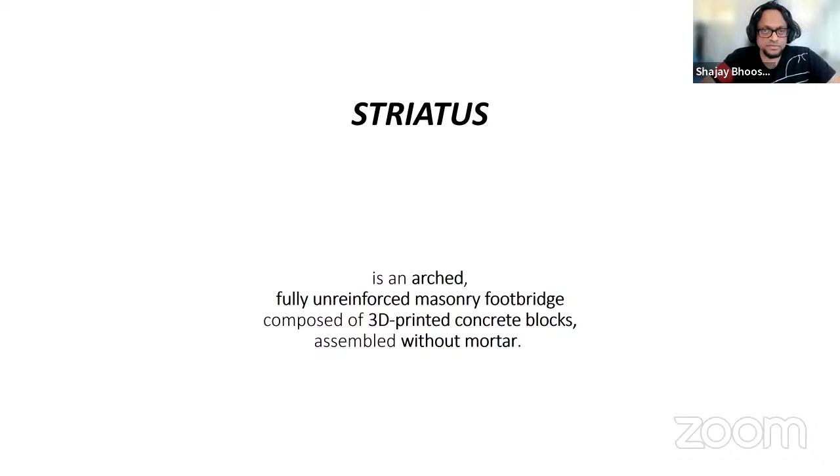So Striatus is basically an arched, fully unreinforced masonry footbridge. Why fully unreinforced? There is no steel, there's no reinforcement in neither the printing ink nor inside the blocks. And it follows a masonry logic, and it is dry assembled without mortar. We believe it is a milestone in responsible design, and I will take the next 10 to 12 minutes to talk about why we believe so.

So what were the goals of Striatus? This was a project in 2021, last year. And so when we set out to make this prototype as part of the Venice Architecture Biennale, which is a collateral event organized by the ECC.

What we set out to demonstrate is that 3D printing is indeed matured enough that we can now begin to show how 3D printing can play an essential role along with other maturing technologies to responsibly use concrete. So to combine one of the most ancient materials and also ancient techniques of design to demonstrate that low energy, low carbon, thin, lightweight structures are possible, which not only have high strength and can span large distances and can also be high endurance.

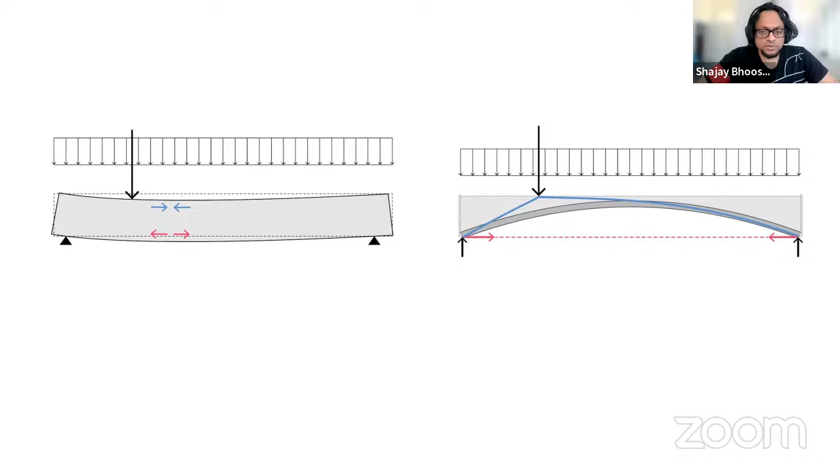So by designing the shape appropriately, using curvature and development of form, which is elegant and aligned with the expected force flow, you can significantly save material. And so that's one of the key messages of Striatus, that as Philip Yuan already explained in depth, there is a relationship between form and forces, which ends up saving us a lot of material.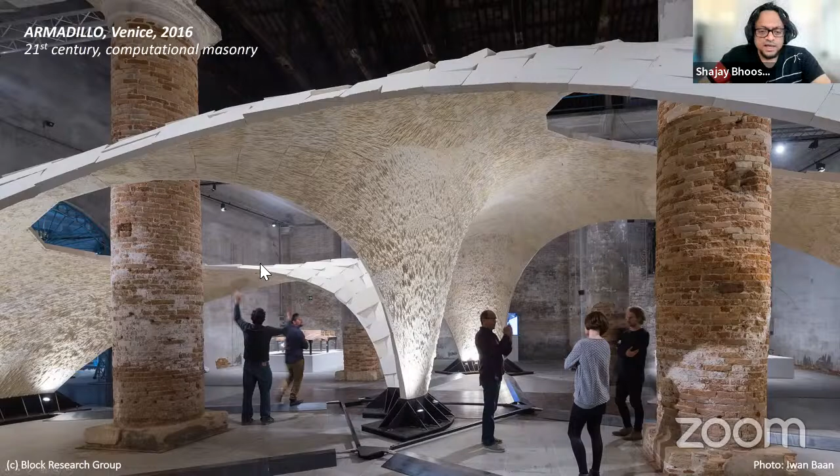And this has also been previously demonstrated in the 2016 Venice Biennale, where the Block Research Group made this spectacular thin stone vault. At parts, it is only 5 centimeters thick, and it clearly spans a large distance. And so Striatus, coming 5 years later, is trying to combine the historic masonry techniques, which have been upgraded through digital means, new knowledge, and new computational frameworks by the Block Research Group. And we wanted to combine that with the maturing technology of 3D concrete printing.

So in that sense, the historic location of Venice also provided added context, where we wanted to extend the previous Armadillo Vault with 3D concrete printing, and inform 3D concrete printing with masonry.

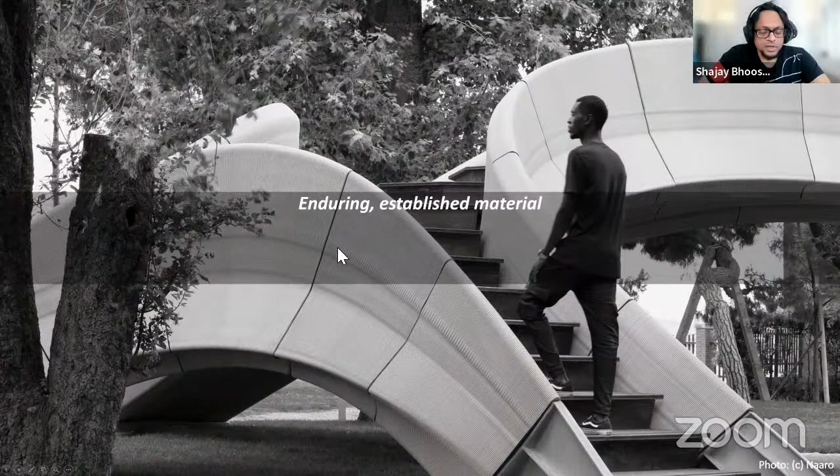So the two main goals that we wanted to demonstrate was that there is a new language for concrete that is possible, a new language for an enduring, very established material that is widely available across all of the world, and combine that with ancient wisdom of masonry, particularly unreinforced masonry construction and design, and new digital and robotic technologies to demonstrate that with a material that is widely available you can design responsibly with concrete.

And so that was the second goal, sustainable digital concrete, where we wanted to show that by combining concrete with digital technologies of design and manufacturing we can demonstrate a pathway to reduce the amount of concrete, and also demonstrate a pathway to show structures that can be repaired and could also be reused and then also be recycled.

So these were the two main goals, and we set out to achieve them through three pillars of parallel efforts. The first of them is strength through geometry. The second is integrated computational design and construction. And the last is robotic 3D concrete printing.

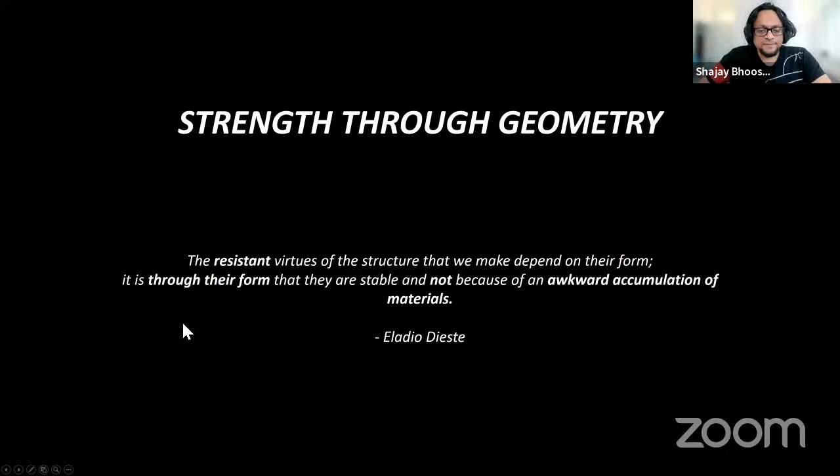So starting with strength through geometry, what do we mean by that? It's maybe most eloquently articulated by Eladio Dieste last century, where he articulates that the resistant virtues of the structures that we make depend on their form. So it is resisting force through the shape, and not some awkward accumulation of material, and particularly not the awkward accumulation of high strength material, which is what we set out to try and do.

So the bridge itself is composed of a central deck, which is completely in compression, and it prevents 6 arches from falling inward. So together they form a kind of hybrid, a composite masonry structure where the arches and the deck act in unison. And the resultant thrusting forces at the foundations are negated by having a tension tie that ties all the feet together.

So that is a simple logic of masonry geometry through which we resist the forces, and thereby the amount of concrete used can be very highly reduced, and thereby also we can ensure that dry assembly and all the other benefits of the unreinforced masonry paradigm can be achieved.

So it's masonry at 2 main scales. One scale is the dry assembly of 3D concrete printed blocks arranged in arch and vault-like shapes, and the other is at the scale of the 3D print itself, where it's non-parallel and inclined plane printing, so that the print layers are orthogonal or perpendicular to the expected force flow.

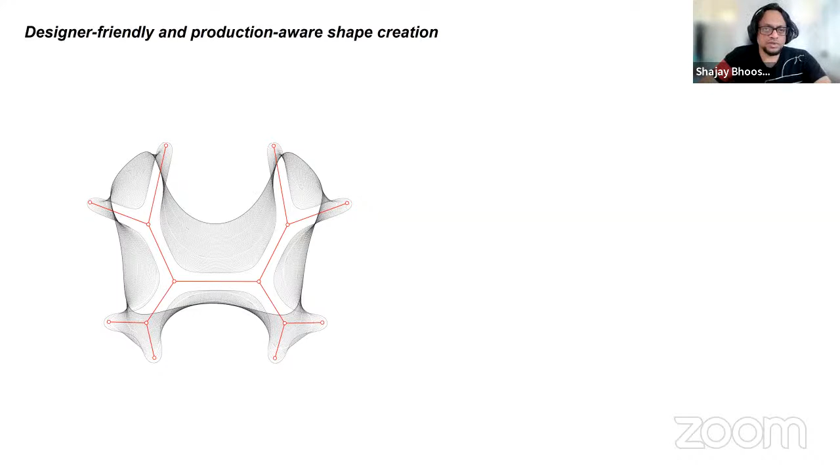So this framework allows us to extend, on the one hand, design-friendly methods, which concrete 3D printing definitely needs, because in the last 30 years all of the effort has been on the material technology and the robotic process technologies. In that sense, design has been somewhat neglected. So we need design-friendly tools, and at the same time, those tools need to be aware of production, what the robot needs, how the material process happens, etc.

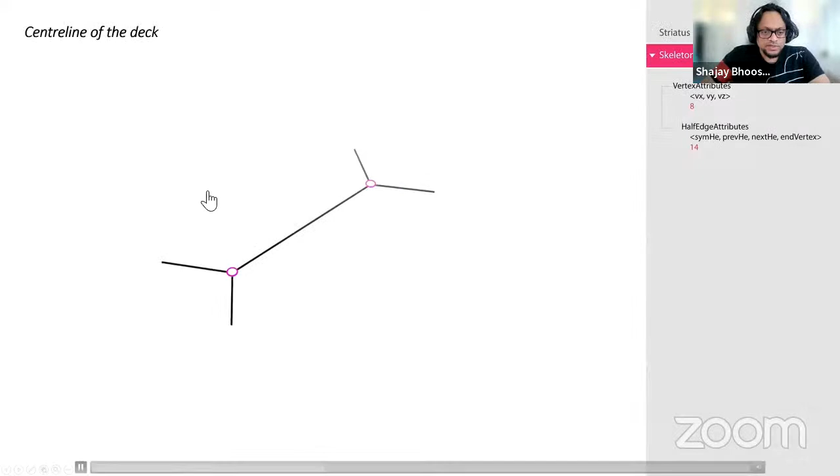So we came up with a workflow that allows designers to design with easy to manipulate control mechanisms, like simple graphs, and in the background we can create all the geometry for fabrication and construction. So we simply start with the center line of the deck, which went through many manipulations, and subsequently we use well-established mesh processing pipelines to thicken the center line of the deck, then subdivide that, and subsequently find an appropriate shape for the deck, which is where Rhino Vault and thrust network analysis play a key role, allowing us to find unreinforced masonry shapes. The global form is in complete compression and therefore doesn't require any steel.

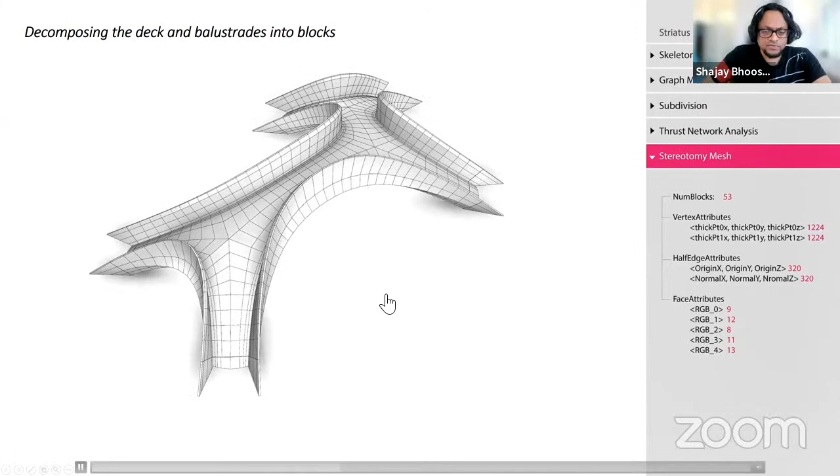And subsequently we also developed tools and algorithms to discretize the geometry into blocks. There were 53 blocks, the so-called stereotomy of the bridge. And these steps went through many iterations. It's not just a one click step; many processes, many iterations of the bridge. And in each iteration, there's also testing using so-called discrete element analysis to consider the load-bearing capacities and also the rigid body dynamic behavior, and whether the blocks are in rigid body equilibrium.

And you can also notice, all along the right, through each one of these steps we are keeping track of the various information that is added to the exchange file that is transmitted between various teams. And so this is our method of communication and method of collaboration, all in a very simple to transmit and simple to read and write file format.

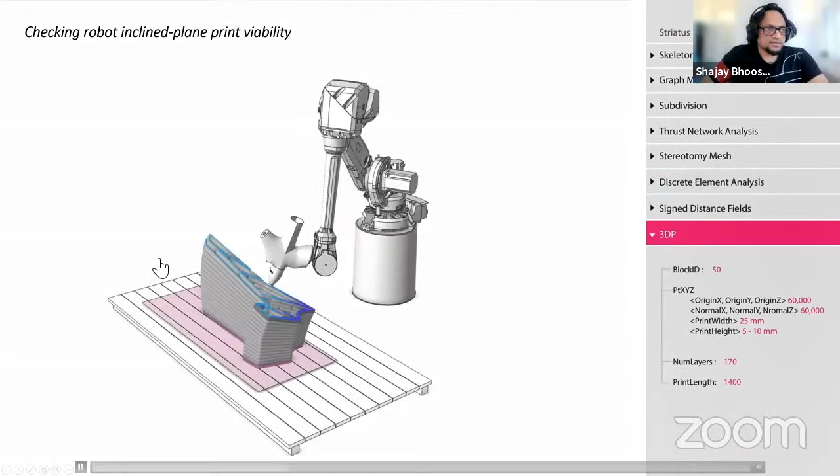And once we know the global discretization and the global form finding, we then develop the print paths, where we design the blocks to locally be perpendicular to the expected force flow through the blocks, both the balustrade blocks and the deck blocks. And each of the blocks has its own unique set of print paths, and altogether there were about 7.5 kilometers worth of print paths that were computed in this way.

And you can see it is also hollow, so it is also locally topology optimizing to place material only where it's needed, thereby saving more of the concrete. And so this process is repeated over all the 53 blocks, which are then printed and assembled on site.

And so the process that I just presented here in a linear way actually took 6 months across 3 geographic locations in London, Zurich, and Innsbruck, and added to the burden was the pandemic. So 6 months start to finish, from design to production to construction, and along the way the G20 was visiting Venice, and we had to shut down the construction site for 3 weeks, and plenty of other unknown things that crop up.

So the integrated design and engineering framework is testament to the flexibility. The flexibility that it offered was instrumental to cope with all of these disparate processes, and to unify them into a smooth integrated design to construction pipeline, and also to deal with unknowns as they pop up.

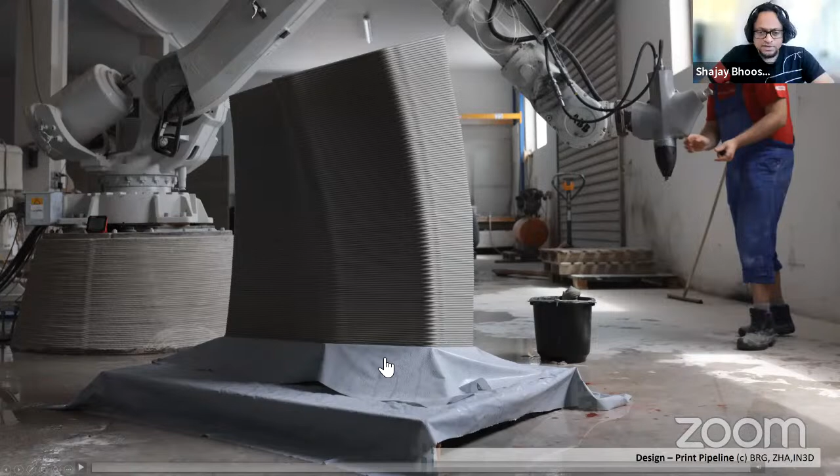So lastly, the robotic 3D printing of concrete. This video might not do enough justice to the digital craftsmanship of Incremental3D, but I hope you can see the extreme care and concern and craft they bring to this process. It's extremely well finished, straight out of the process. There's no post processing, there's no post finishing.

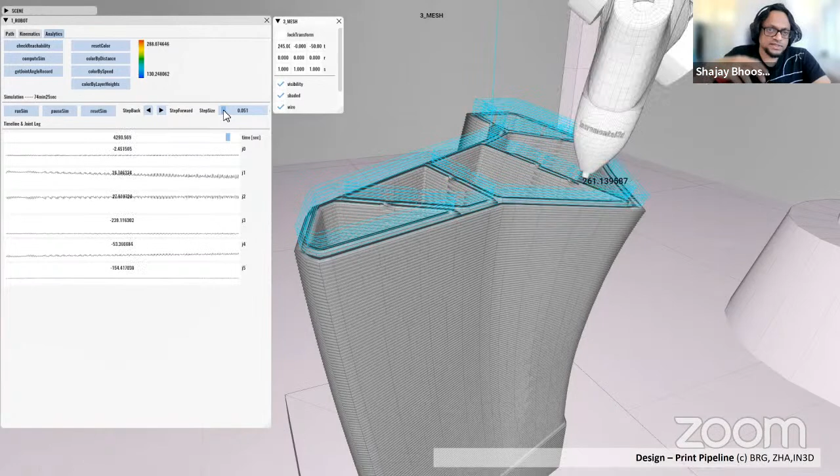And so that's one of the features of 3D concrete printing, is that it is inviting craftsmanship back into the construction industry. And the fact that their production pipeline actually talks to the overall design to construction workflow, and it's deeply integrated, is also an essential feature of such collaborative work, that the fabrication side of the software talks with the design side and with the engineering side from day one, and not in a linear way.

And one of those benefits was this particular groove, which we discovered when we did the first test print. It wasn't designed to have that groove. It's just that the robot has to turn, and when it turns, it goes slow. And when it goes slower, there's more material extruded there, and so it naturally creates this groove, because you want to have a continuous path so that there's no starting and stopping. So we naturally had to account for this groove.

And so we incorporated that into the design process, so that we made sure these grooves are aligned, they occur exactly in controlled ways across each of the layers. And the other such feature was every time the infill turns, it will produce a groove on the outside, as you notice. So the groove on the outside is a consequence of the infill pattern.

So there are all these tectonic possibilities that we discovered because Incremental3D was part of the design team from day one. So that's another feature of contemporary design to fabrication workflows, which opens up new degrees of expression.

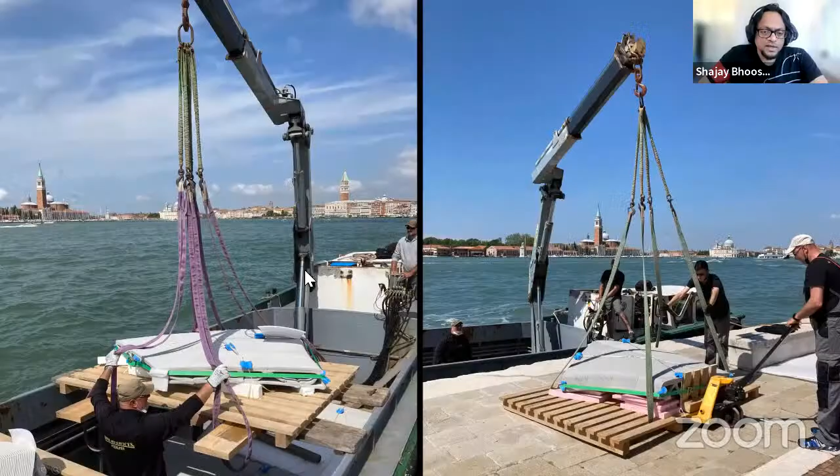So finally, all of this was printed and transported to Venice, and you can see it's only a lightweight boom mast that we need to lift all of these 3D printed blocks, and then there's a scaffolding erected, and all we need is again one single spider crane, and I have to give a shout out to Theo Burgin and his crew, again highly skilled construction, which is being invited back into the construction industry.

And so 53 blocks were assembled, starting at the feet, and then building up the arches, and first the deck and then the balustrades. And here's the last keystone, leading to completion of the bridge, which opened in summer of 2021. And to our surprise, because it was in a public park, lots of people started using it.

As soon as it was open, naturally it became part of the everyday life of people using this park, which was very satisfying to see, that all parts of the bridge were actually used. There were dogs running up and down the bridge, and children running around on the bottom, and so on.

So one of the key takeaways for us through this exercise is that we hope to demonstrate that the masonry paradigm and 3D concrete printing is a perfect match: force-aligned 3D printing, dry assembly, fully unreinforced concrete, and also separation of steel and concrete, which is very essential for recycling. We have these 3D printed blocks, and the tension ties and the footings are the only steel used. We can easily separate these two and recycle them individually.

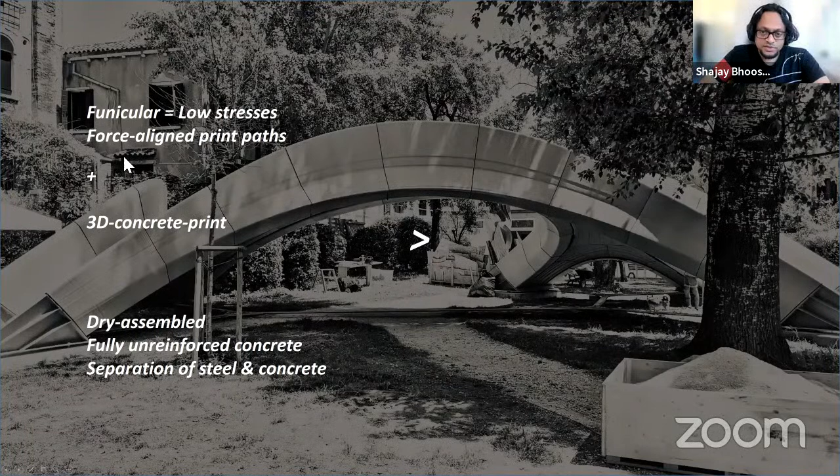So all these features of the bridge, which come because we combine masonry design and analysis techniques with 3D concrete printing, allow us to demonstrate a pathway for responsibly reducing the amount of concrete used and potentially reusing the concrete, which is currently underway. The bridge has been dismantled and crushed, so it can already be used.

And potentially you could also repair sections of the bridge, because you can have temporary scaffolding, disengage one of the blocks and insert a new one. And as I said, it also allows us to recycle the two materials.

And Block Research Group is commercializing this floor slab, which incorporates many of these principles. The key benefit is that we can reduce the total amount of concrete and also steel used at no loss of tectonic expressivity. So that's one of the things we wanted to demonstrate, that a new language for concrete is possible whilst being sustainable.

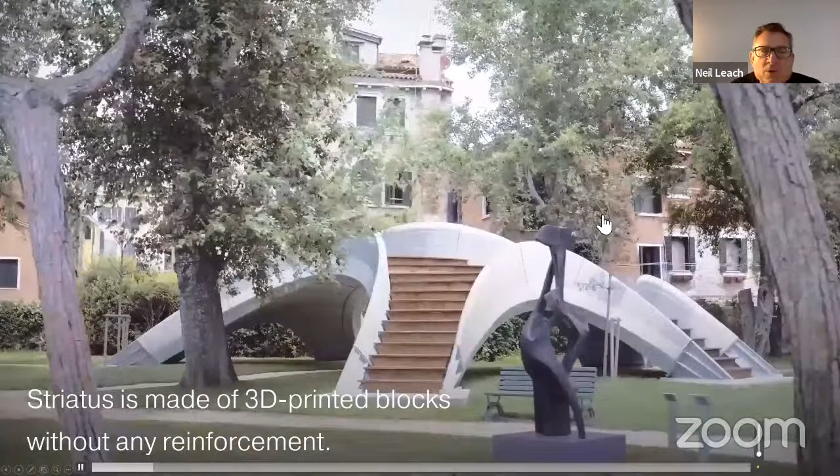Thank you, Shajay. That was absolutely fascinating. I can't help feeling that the bridge, as well as being the subject of what we're addressing here, is also conceptually the way we're operating, bridging architecture and engineering, bridging academia and practice, and indeed bridging across the globe, because we have Enrico in Italy, Shajay in London, Philip in Shanghai, I'm in California, and Pavleen, who's live streaming, is in Mumbai. We're bridging the world. At the same time, we started off in Italy, and we're going back to Italy as well.

So I would like to open up to questions at this point. This has been one of the best ever sessions of Digital Futures, because it is so focused and addresses such an important question. Maybe I would like to start by inviting Enrico to comment on the bridge in his native country of Italy, and the way it's gone from the bridge of Enrico's father to this incredible recent structure.

What can I say, Neil? I truly admire it, because if I go back to that time, I was completely alone in thinking about the endless possibilities offered by 3D printing. And I was dreaming about what the next generation might enjoy from these new opportunities of making new architecture. Because every generation needs to develop its own architecture. It's a way of expression, architecture.